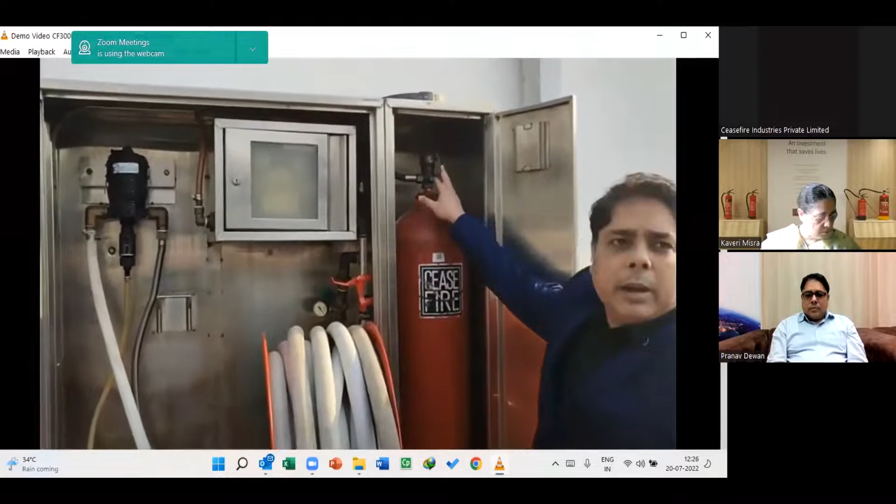Hello viewers, today we have the CF3000 systems with us. This is the twin fluid technology of water mist. Let's look at some of the components of CF3000. We have a 68 liter 300 bar nitrogen cylinder over here. This is actuated by a manual actuator. Then we have a valve on top of this cylinder with a working pressure of 300 bar. The output of the valve is connected to a pressure regulator. This pressure regulator reduces 300 bar pressure to 5 bar pressure.

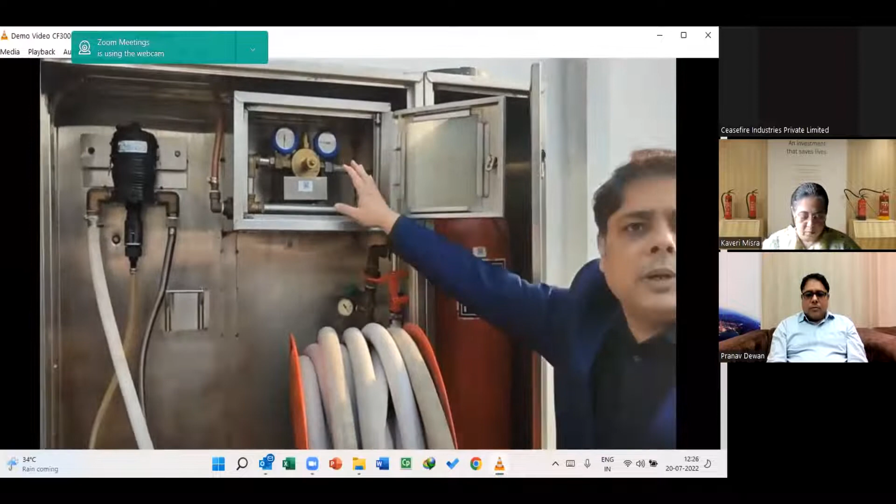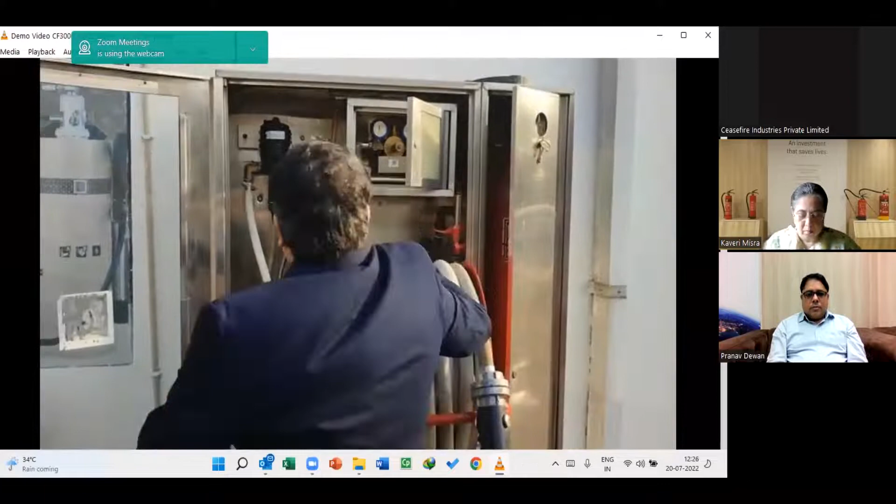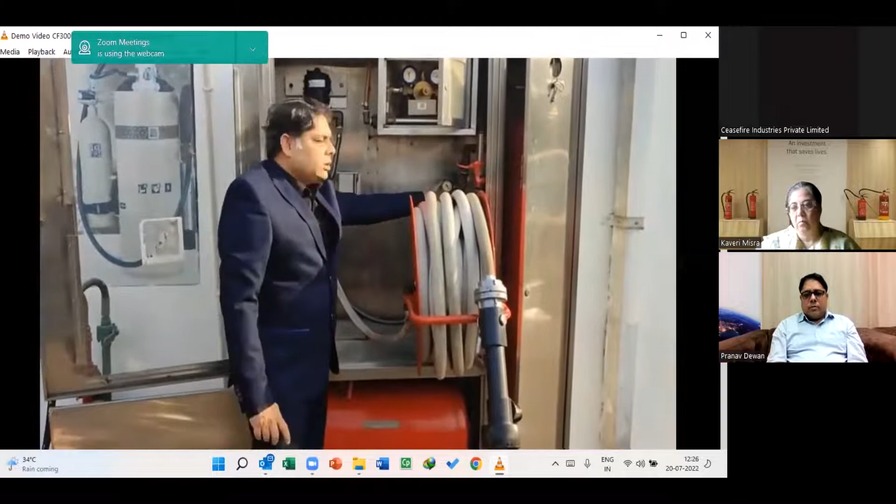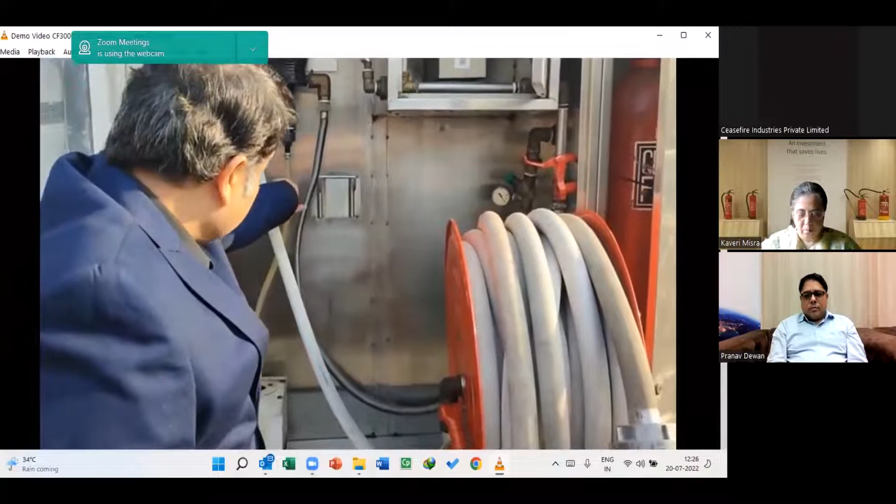5 bar pressure is split into two parts. One part goes to the nozzle directly. The other part goes to the water chamber at the bottom. The water cylinder will have 60 liters of water in it. The output of this water comes through a regulated supply at 4 to 5 bar and it goes to a foam pump. The pump sucks this foam from this reservoir. The output of the pump goes as a second input to the nozzle.

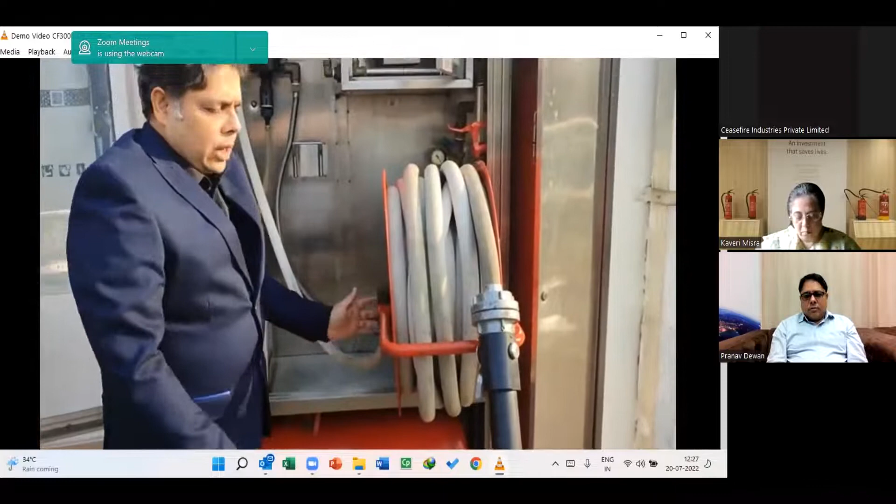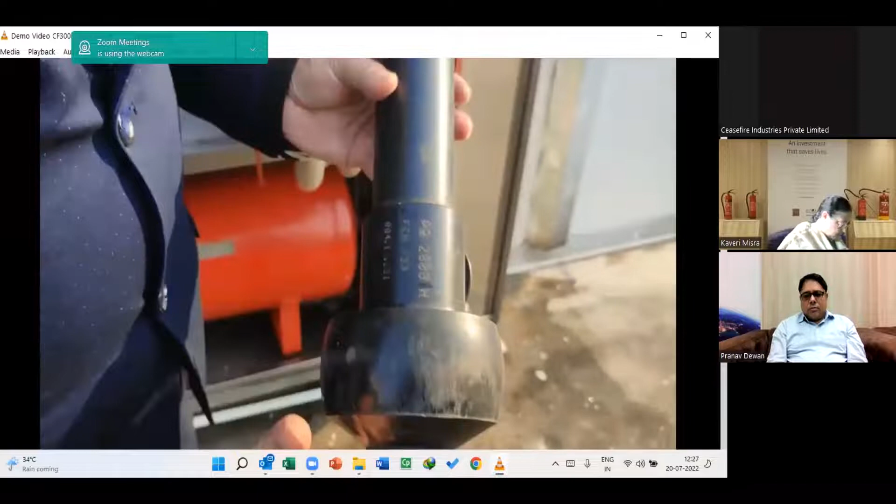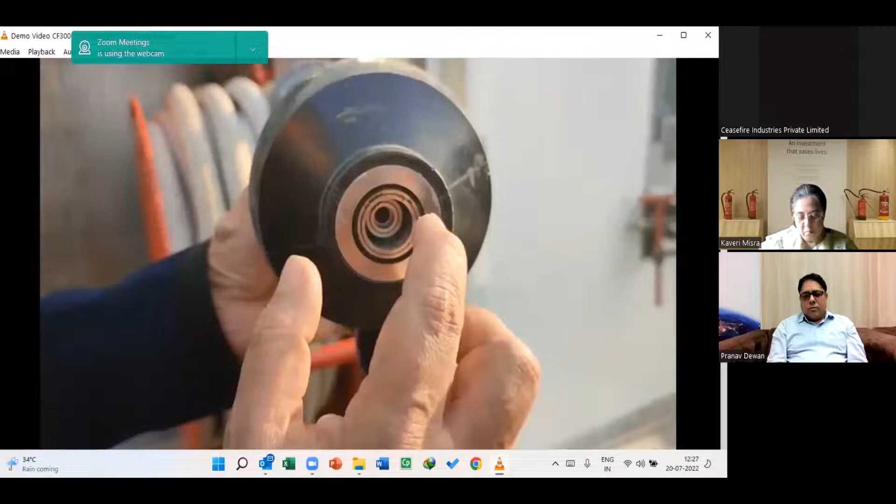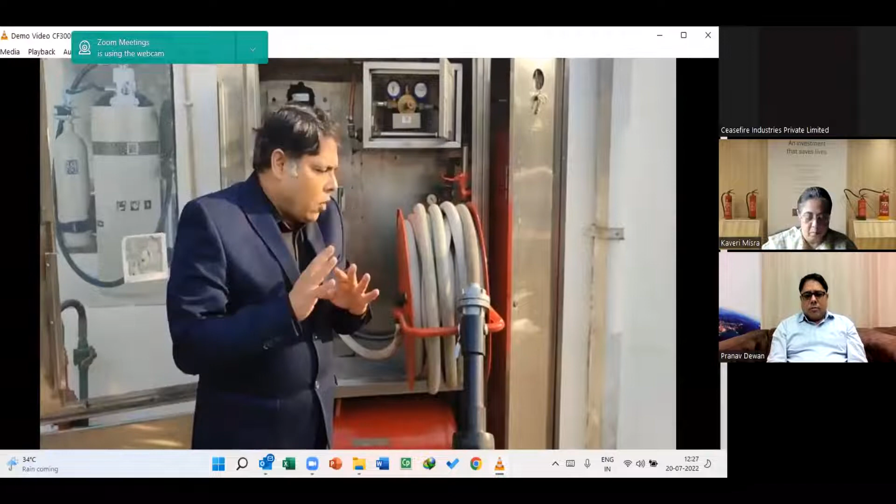Here we have a Fen 233 nozzle, which means it has 2 water orifices, 3 air orifices, and 3 cubic meter per minute of requirement. If you look in front, these miniature holes are your water holes, and on either side of this we would have nitrogen coming out at 3 Mach. At 3 Mach speed and 5 bar pressure, the air reverberates at a very high velocity. When it reverberates, the water which comes in contact with this air is particularized and we will get water particles of about 80 microns. Now, if we want foam induced into the system, we have a separate lever on the side which we can turn to suck in foam, or we can just use mist.

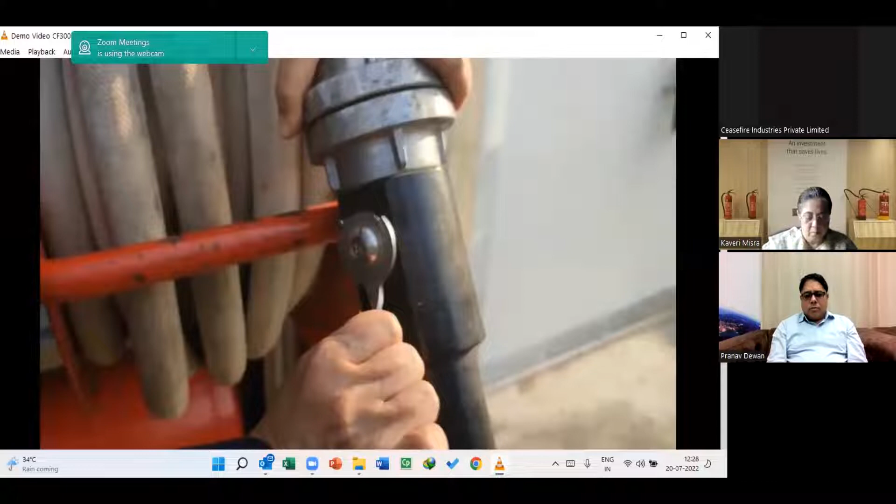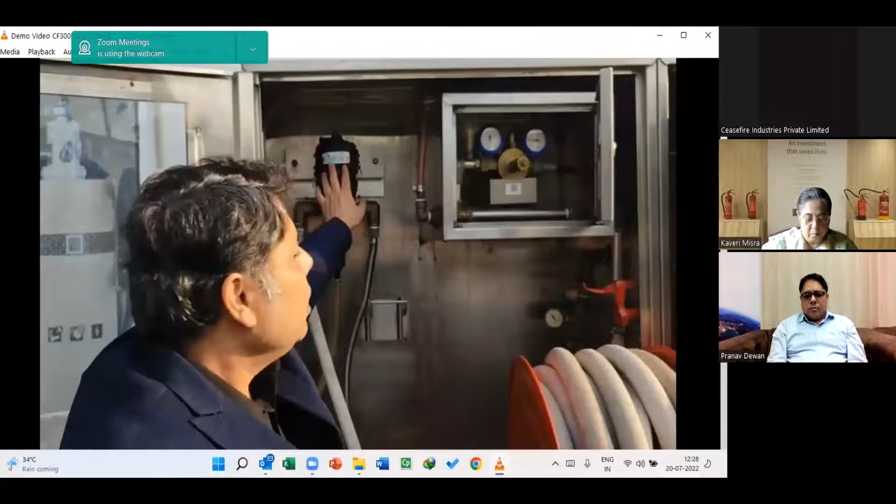Now, let me explain how water mist works. We are trying to increase the surface of water to absorb as much heat as possible from as small an area as possible. It is known that about 2.26 megawatts of energy is consumed to evaporate 1 liter of water in a second. This is the potential of water.

So if we particularize water, we will increase the surface area and we will make the efficiency of water far greater, where water can quickly turn from liquid to gas as steam, and in this conversion it cools the surface of the fuel, and as it evaporates, the steam envelopes the fire zone, and as it envelopes the fire zone, no air can reach the top of the fuel.

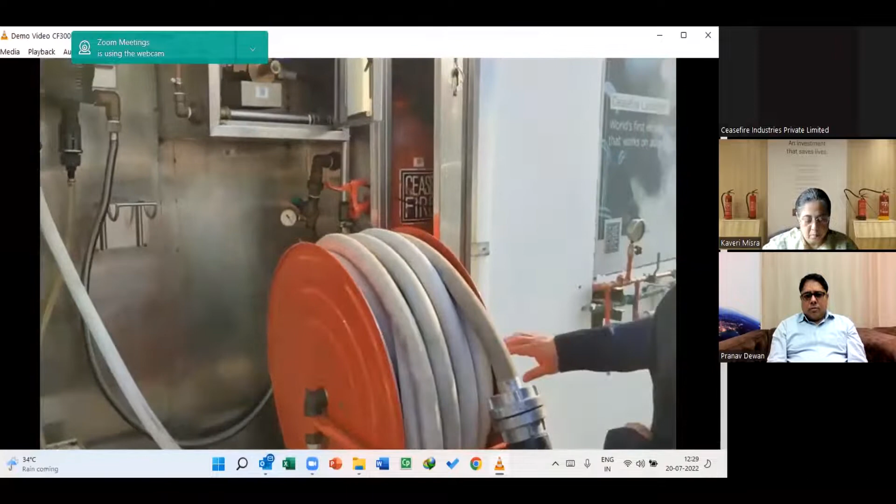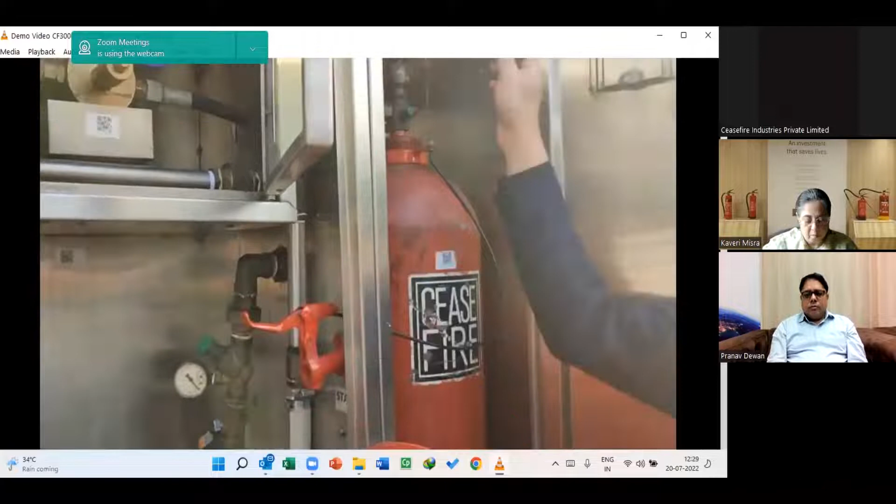Now let's look at the operation of this system. Very simply, you have a safety seal on your manual actuator. This safety seal is pulled off. As this safety seal is pulled, this clutch lever can be switched on. Once we press this lever, the system will get activated and it will stop once the cylinder is empty.

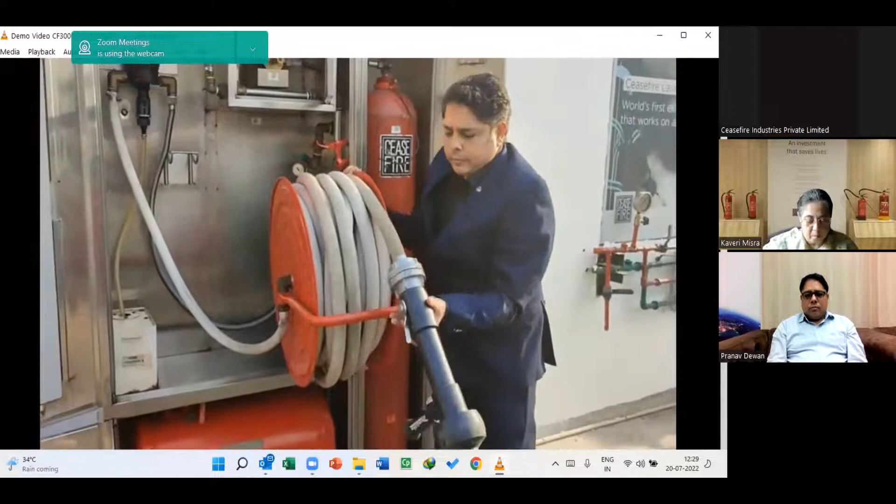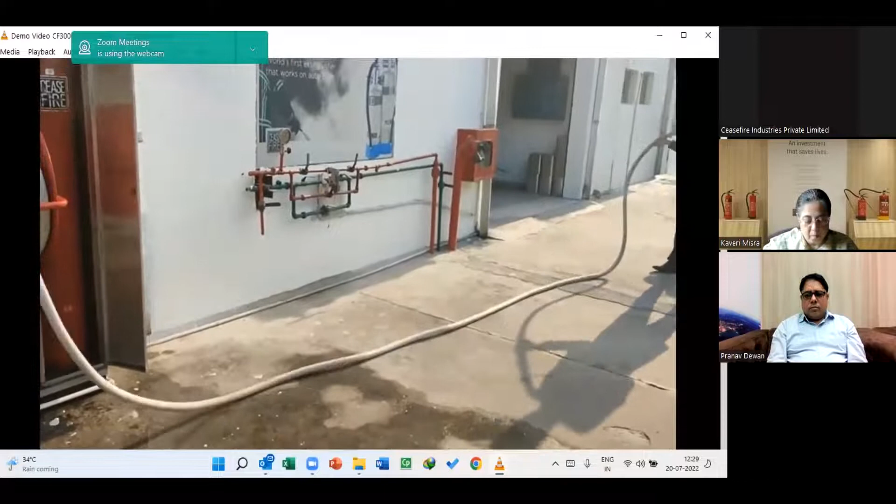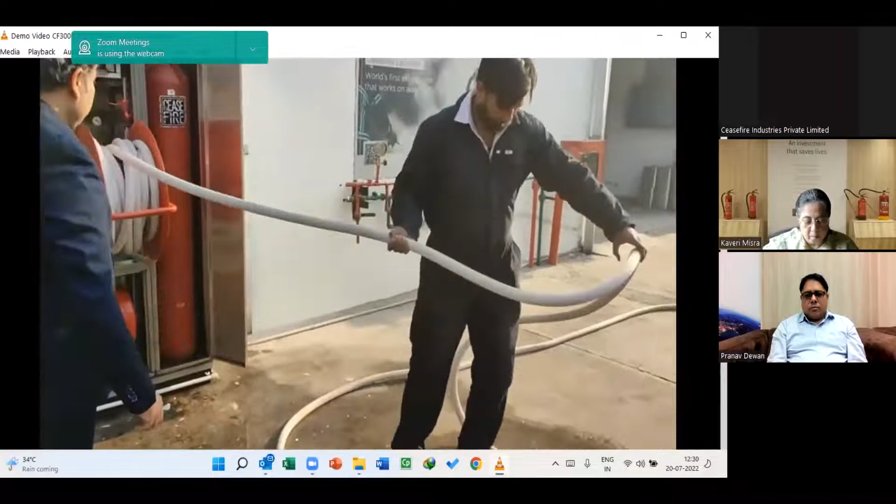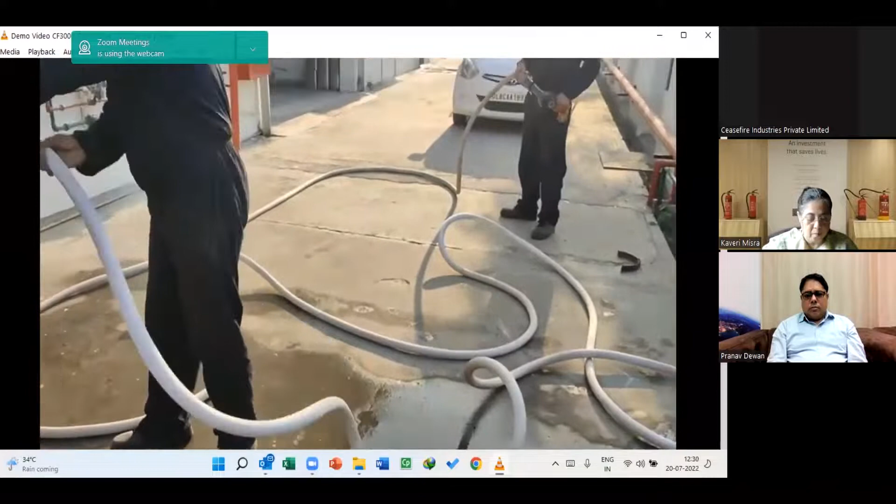Okay, so before starting the system, the first thing you should do is to uncoil this 30-meter hose pipe. You can now immediately remove the safety seal. Remove the safety seal.

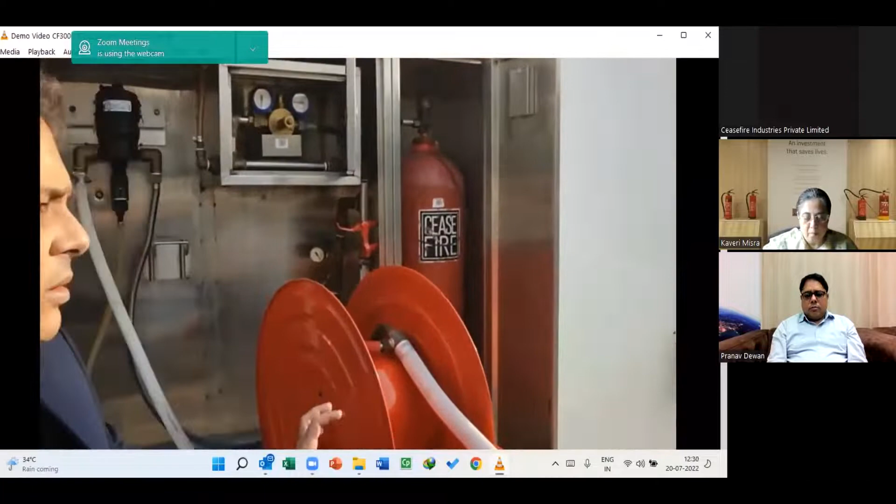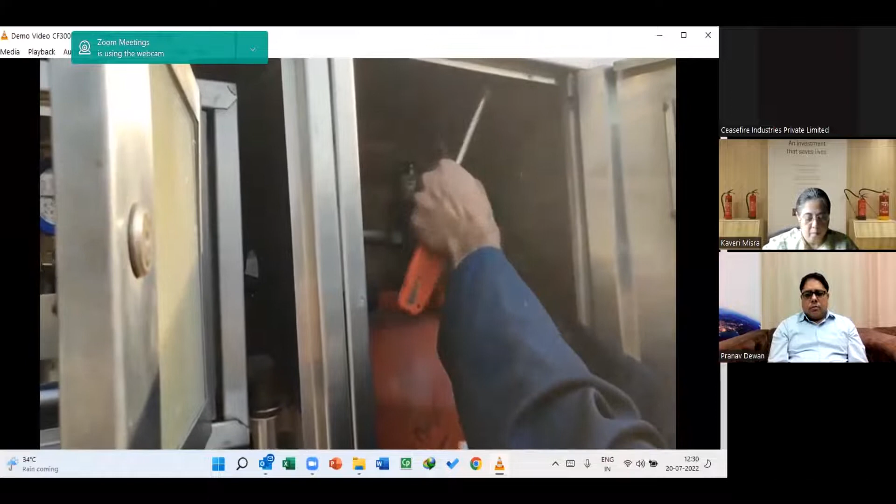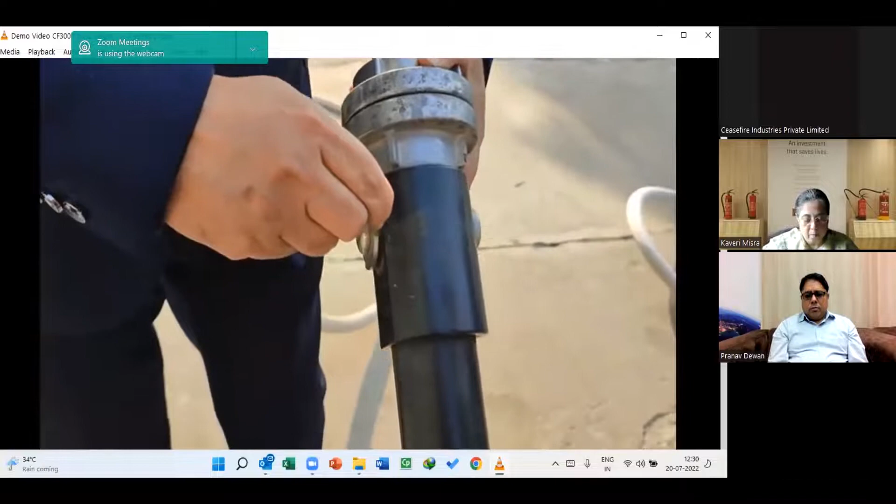We have a rotation joint or coupling from hose and the nozzle, so you can easily move it about. Since we want foam to come out of this, we will keep it on foam. Now we just have to hold this, activate the system and aim at the base of the fire. So let's start a fire.

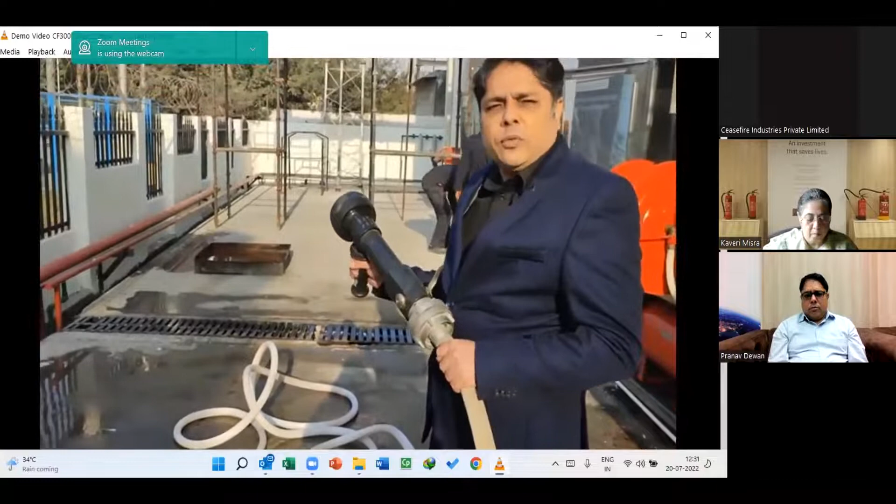The system would have an effective working time of about 4 minutes, which is quite ample time with mist, and especially with foam mist. The gun weighs about 2 kg, about 1.8 kg to be exact. We've put in fuel. I'm going to light a fire.

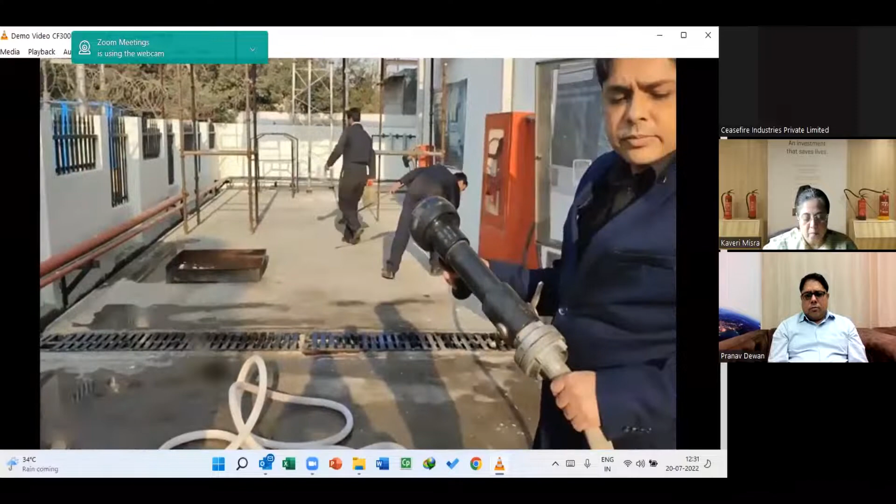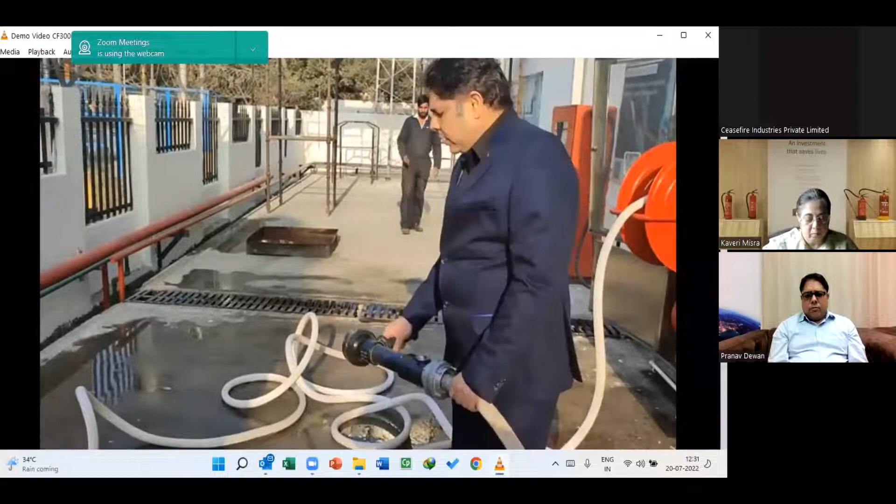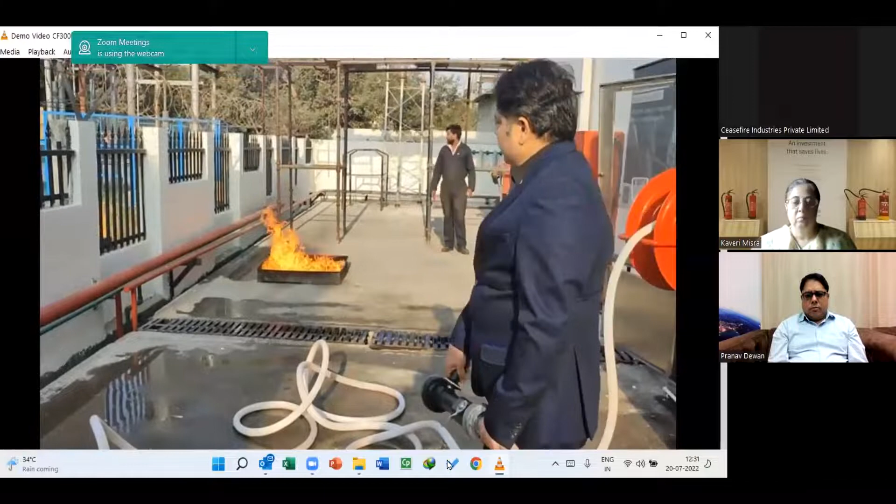So whenever you're fighting a fire, please be careful that you approach the fire from the side where the flames are moving away from you. This will keep you protected. And anyways, when mist is flowing, it gives you a shield from the heat from the flame. We let the fire grow a little. Let's see the actuation of the system.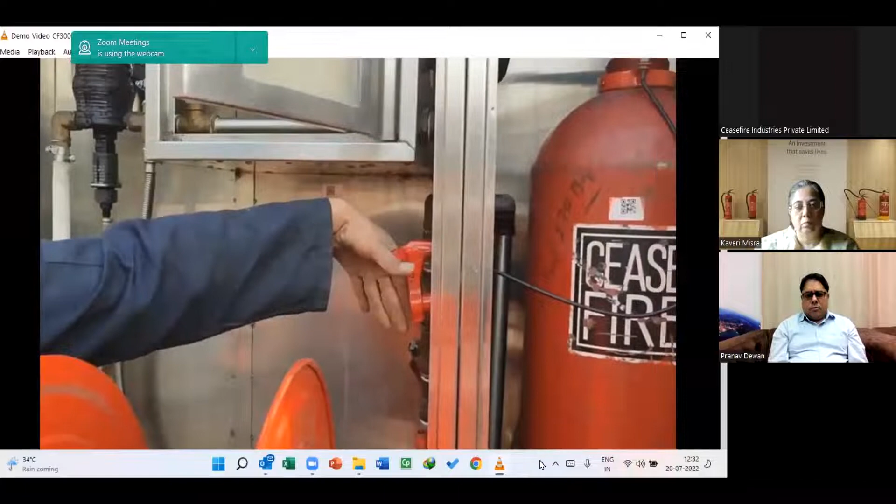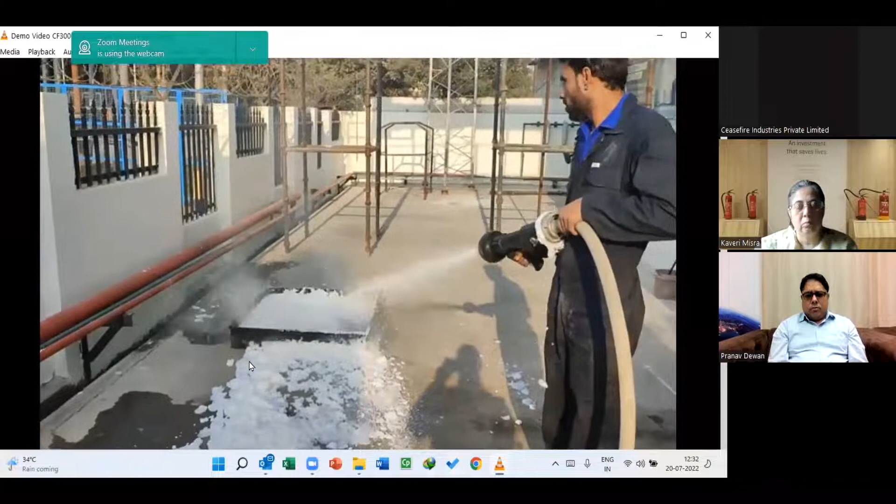So this was the first video where we are showing you the complete panel that is there, the cabinet which is there. As you can see, the cabinet houses the entire system. And it is a system. When I say the word system, it means a number of components that work together. It is designed to work in a standalone manner.

So you can put it into areas like maybe malls, manufacturing units, parking lots, residential areas, in the residential buildings, where probably you cannot do plumbing and get a water hydrant system kind of a thing there. So you can place these cabinets at the right spots to ensure that in case there's a fire in that area, the fire can be fought through these.

Let me show you another video which was done for demonstration purpose, where you can actually see the flow, the throw of this particular product, along with the fact that it can work both in the form of a jet as well as in the form of a spray. So jet is when the throw is straight in the form of a straight jet, or what we call in Hindi a dhar. And if I talk of the spray mode, then it is spread out.

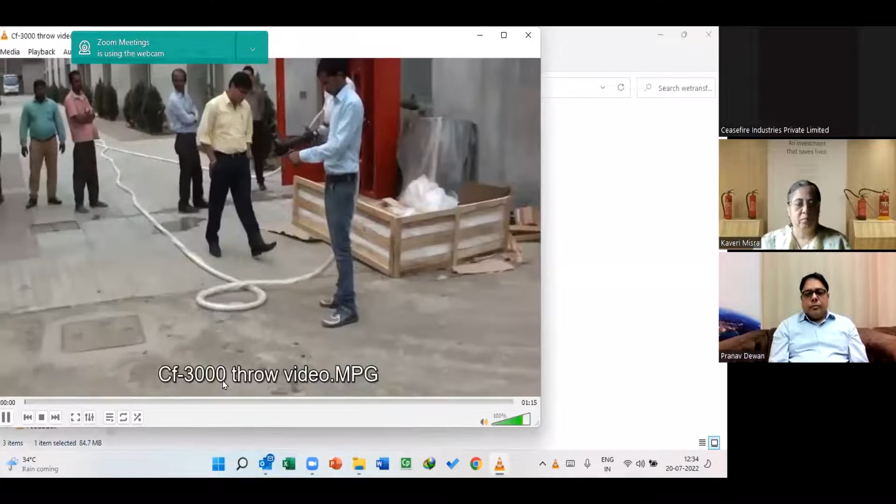So normally, if I'm not mistaken, Pranav, you people use the jet mode, which can be done from a good distance to subdue the fire to a certain extent, and then you use the spray mode to finally put the fire out totally. Am I right? Right. Absolutely right. So just let me quickly take you to the second video now. So we are not showing a fire action here. We are just showing you the throw here.

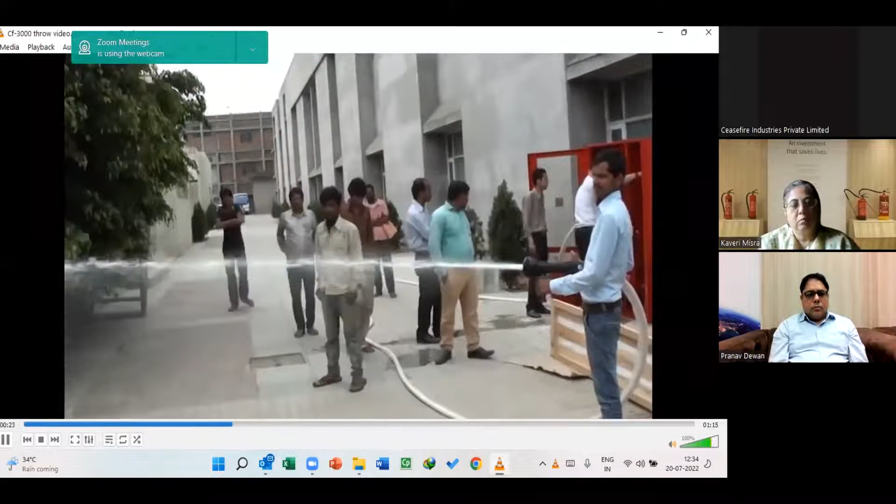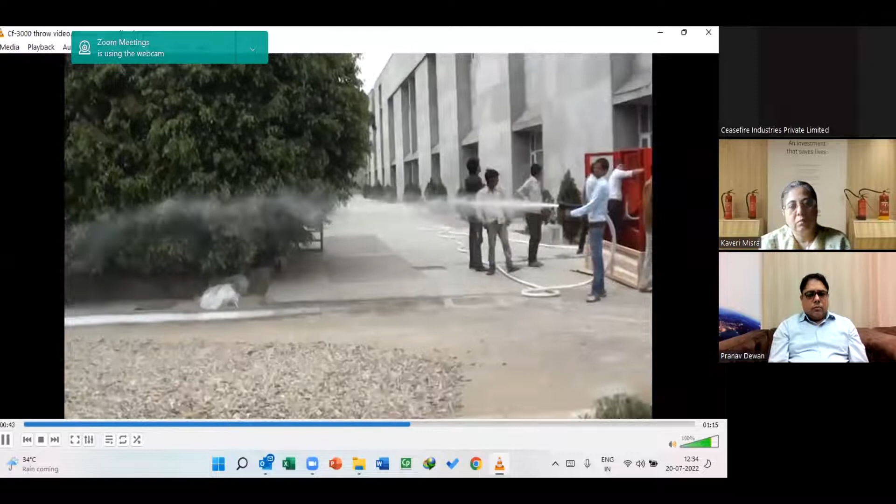So you viewers, can you see the exact difference? In the jet, it is a complete jet of water which is getting thrown out, so it's easier to put out the fire from a distance. And as you can see in this mist, it becomes misty, the droplets are formed, and it is now much more efficient in putting out whatever fire is left. So let's look at this.

Now completely used up. So this was our watermist fire extinguishing system, which is a standalone hydrant system known as CF-3000.

Would you like to add something to this, Pranav? What is the throw? When do you use the jet mode and things like that?

Okay Kaveri, on a 300 bar cylinder, the maximum throw you'll be able to achieve with foam content would be around 10 meters, up to 10 meters. That will be the max. As the pressure goes down, you will obviously have a reduced throw. But with the mist, you will have somewhere around 5 meters.